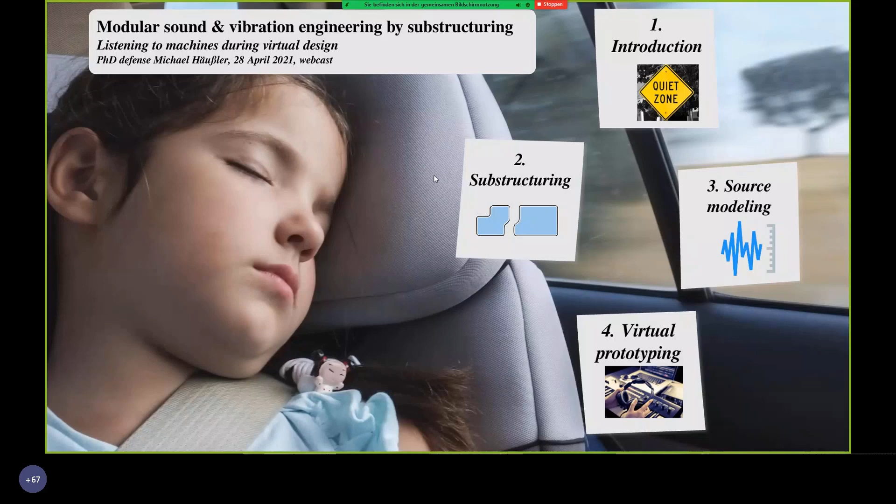And what we don't want is to be disturbed by any background noise of machines running in the car. So my talk is about the sound engineering required to design cars towards this goal. I'll give you a quick introduction by showing you a current electric vehicle in production. Down here you can see the battery, a lot of cables, the car body, and this component in the middle is called the electric climate compressor. These components can be very noisy, especially when they cool or heat the battery cells.

And I'm going to give you a quick listening example of that now.

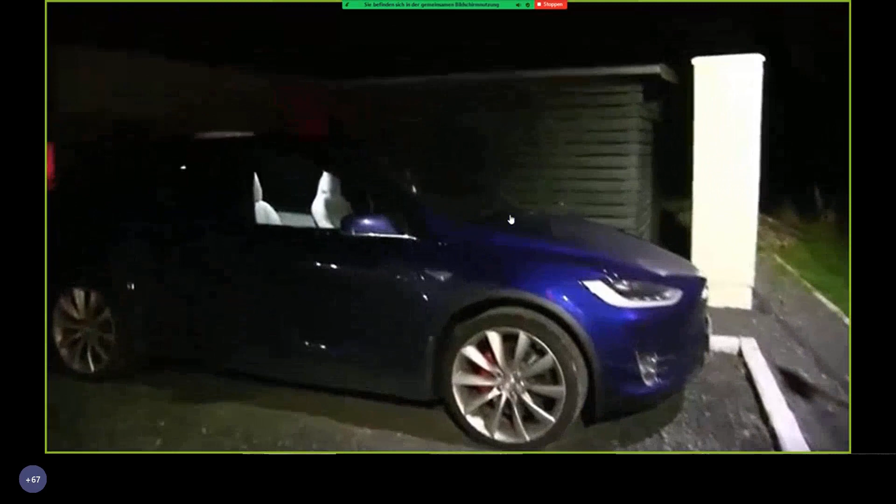I am at the supercharger in Elverum, and right now I'm getting about 100 kilowatts. And you hear this noise? This is completely normal because we are receiving so much energy so fast. So the compressor are working on high gear. You can actually feel the heat coming out here. Yeah.

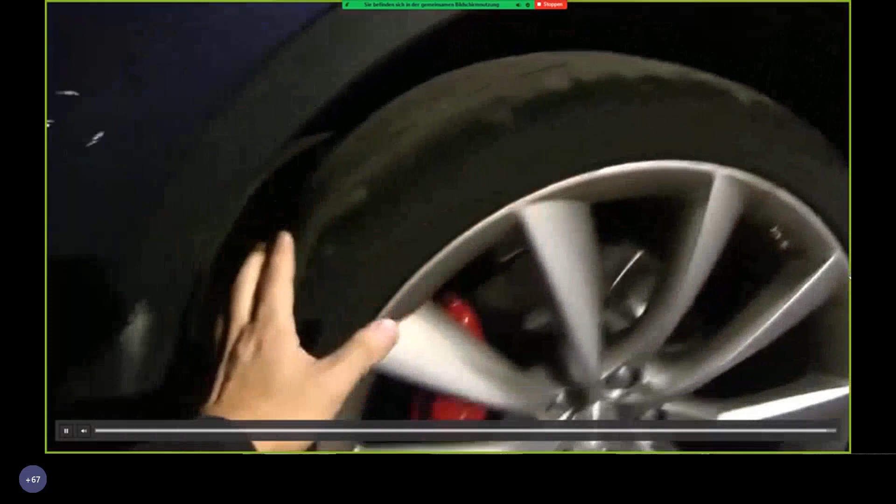So this YouTuber is perfectly right. Unfortunately, the cell heating rate goes up quadratically with the current when charging or discharging the batteries. So we kind of need this component in every vehicle.

Now the art of acoustic engineering is really to think about how we connect this thing to the vehicle and isolate the sound in order to not hear it. But it even goes further because you cannot just add excess material which is not required. If you think about acoustic countermeasures, you could think about intermediate masses and sound insulation capsules, but they all add weight, costs, and excess resources that you need.

And if you then think about the yearly production rates of popular vehicles, you can see that this is actually an important point to consider to get your models right for a good design. To make things concrete, I'm showing you here the setup of the virtual prototype, which I'm going to show you at the very end in my PhD thesis. This was a climate compressor that was isolated from the vehicle with a double isolation, so you've got two sets of rubber bushings and an intermediate mass called a carrier in between.

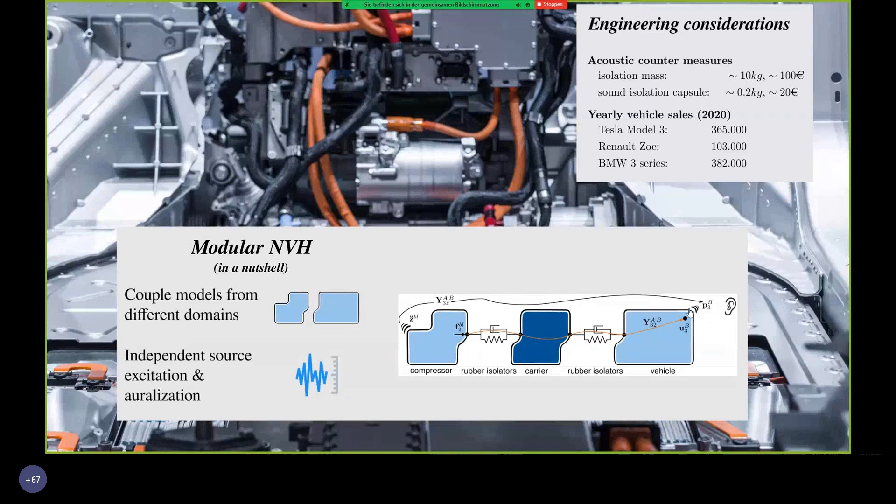What you really then want to do is take individual component models, which you model with the most convenient approach, and virtually couple them together in order to predict the vibration and sound transfer path all the way up to the driver's ear. You also need an independent description of the source excitation of this component, which in this case is the compressor. This both transfers sound and vibration over the structural connection points and also over the airborne path by radiating directly from its housing. Then you want to do some signal processing in order to listen to your design that you now have virtually in your computer. This is what I'm going to explain in more detail now.

So let's jump into substructuring. Imagine you've got a model of structure A and structure B, and you want to couple them. There are really only two coupling conditions: you've got the vibrations and forces acting on the interface on structure A and structure B. If you want to couple them, you must ensure two coupling conditions: first, that they have the same vibrations on the interface, and second, that the forces acting on the interface are equal in magnitude but opposite in sign. This is really just Aktio ist Reaktio from Mr. Newton.

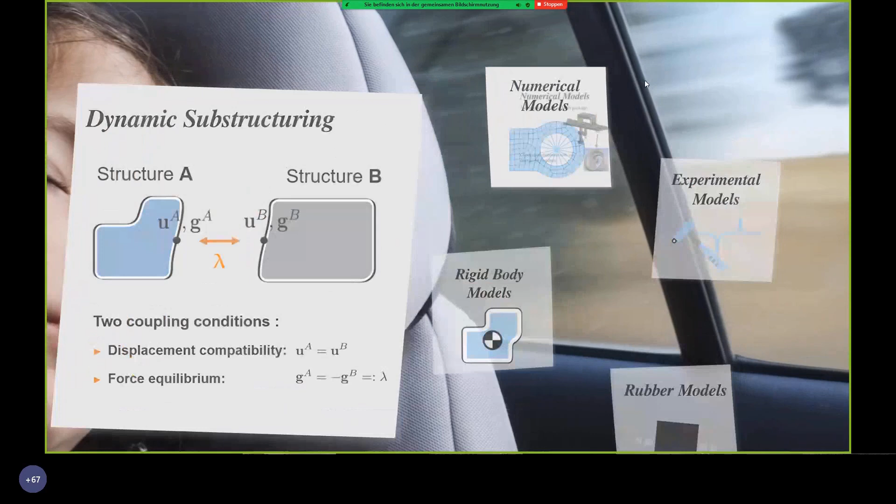So this is not so difficult, but the question is really, how do I get a good model of any substructure? The first thing that comes to mind is a numerical model, and you can obtain a description of your components by any standard finite element or multi-body simulation package.

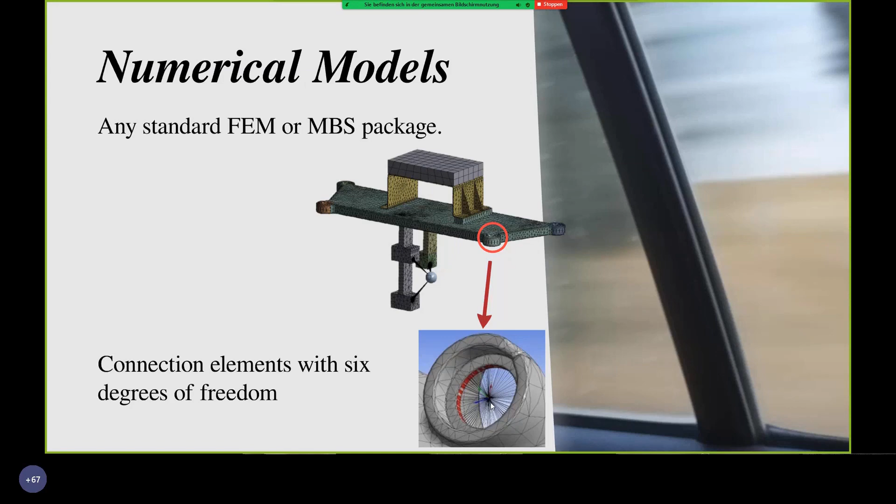As I've shown here in this example with a finite element model, you can take your connection points at the interfaces and place one of these rigid elements there. These are like a virtual point in the middle of the connection point with 6 degrees of freedom where you can enforce the coupling conditions with the next structure.

What you can also do, if you have a complex structure that's too complex or takes too long to get an accurate numerical model, or you just don't have one, is take an experimental model. This seems straightforward at first, you take vibration sensors and force sensors and measure the relation between forces and vibrations at these interface points. But in order to have a description you can couple to other models, we use something called the virtual point transformation, which is really key to most of the things I'm showing here.

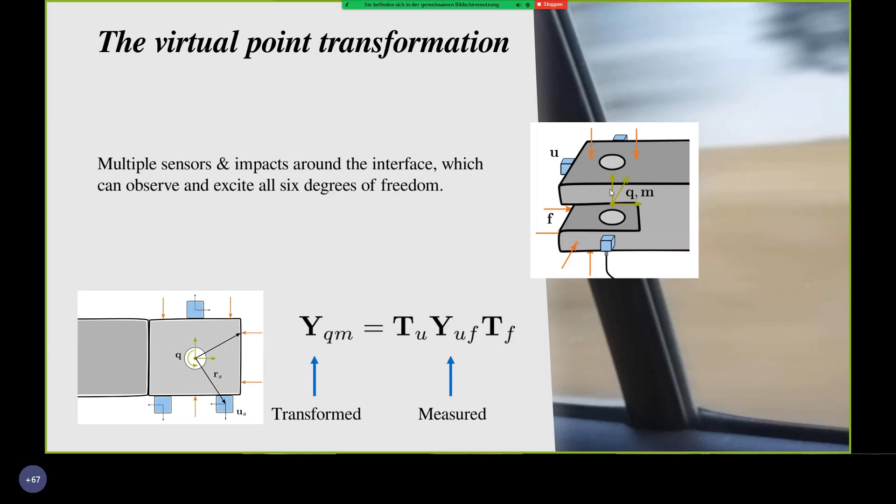So what you do is equip your connection points with a couple of sensors. You perform a few impacts with your force sensor equipped impact hammer, and then measure a transfer function. By knowing the geometry and position of your impacts and sensors, you can use transformation matrices to transform your measurements to a description at a virtual point in the middle of this connection point. This is then compatible again, for example, with your finite element model.

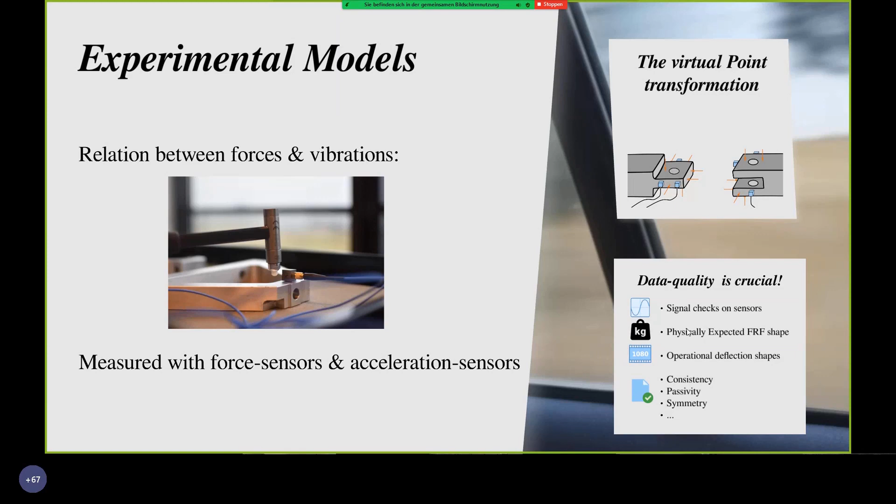The real catch, and what I want to stress here, is that data quality is crucial. You want to do all the checks at your disposal for confirming you have an accurate experimental model. We've learned the hard way what can go wrong in these experimental models. But other than that, this is a really handy modeling approach for a substructure, and rather quick if the structure already exists.

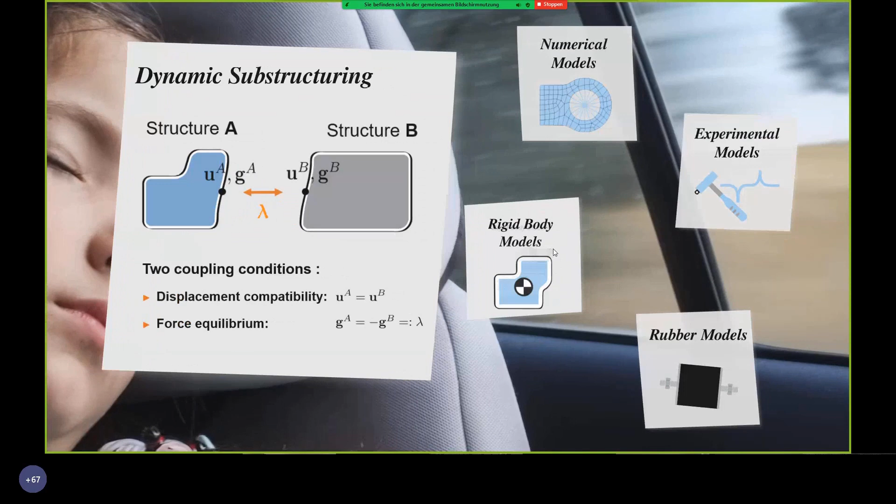What's even quicker, if you have a really simple structure in your transfer path that you can model as a rigid body, is to just model it as a rigid body. Imagine one of these crosses, they're basically rigid in your frequency range of interest. You just define a general coupling point on this cross, and we formulated the equations such that they fit nicely into this substructuring framework.

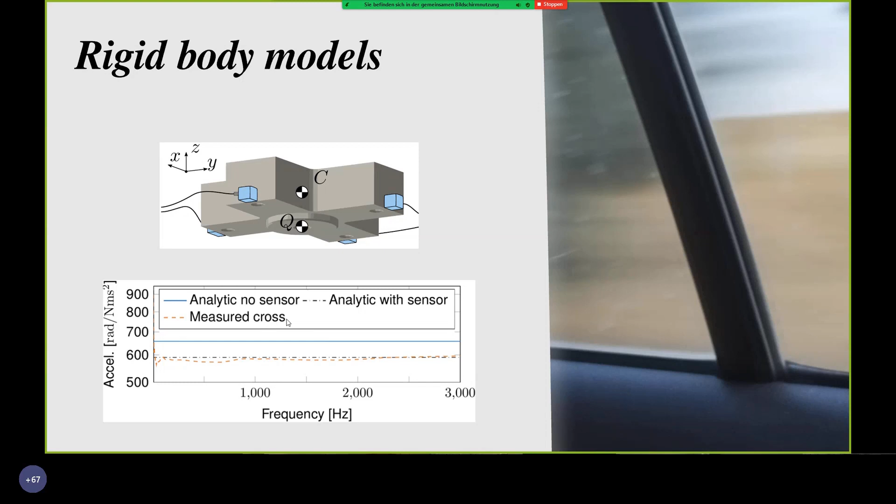The only thing I wanted to stress here is that it's important to also consider the added mass of these sensors. If you do this, you can get an almost perfect match between your rigid body model and a reference measurement. This turned out to be very handy for some simple structures, or these crosses that you can use for testing.

And then lastly, you often have rubber isolators in your sound transmission path. Here it wasn't exactly clear to us how to model this at the beginning of my research project, because you have quite a few challenges with these rubber models.

One approach we found in literature was called inverse substructuring, and here the idea is quite simple. Imagine you take two of these crosses I've just shown you and attach them to your rubber bushing, perform your measurements on these crosses, and transform them to two virtual points with 6 degrees of freedom on either coupling point of the rubber bushing.

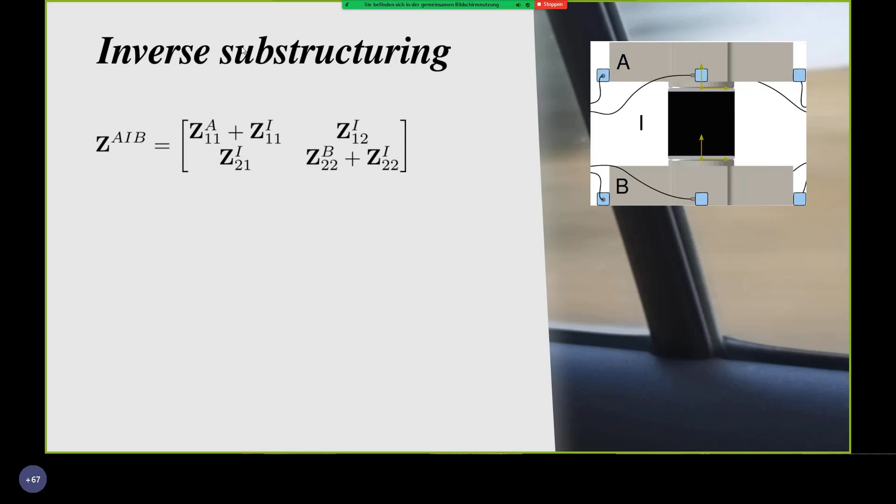So you end up with a dynamic stiffness matrix of this assembly. Inverse substructuring uses the fact that these off-diagonal terms are only a property of the connection element, which is the rubber isolator. To come up with a model for this full isolator, you assume a simple topology and a negligible mass of the rubber isolator.

To make things really simple, if you just think of two masses connected by a spring and look at this dynamic stiffness matrix, you can see minus the stiffness on the off-diagonal, and then recreate the on-diagonal term you want. So basically you make this simple topology, degree-of-freedom to degree-of-freedom connection assumption and negligible mass assumption, and then build your rubber isolator model from that.

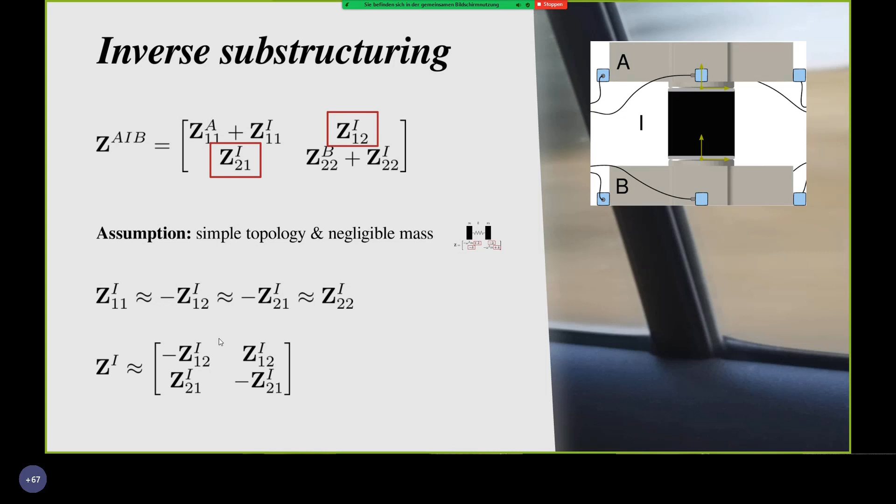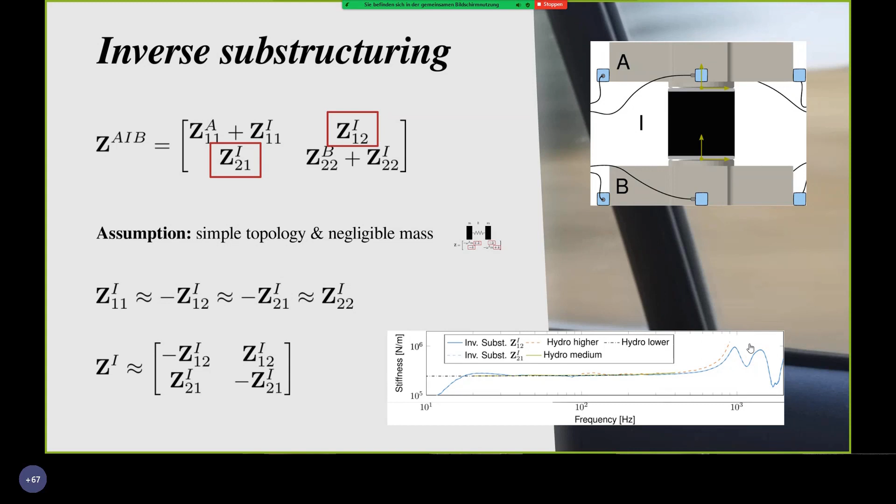Now, if you look at these off-diagonal terms, which you can validate with measurements on a hydropulse measurement machine, you get a pretty accurate match in the determined stiffnesses. What's also interesting is that towards higher frequencies, you can see these dynamic stiffening and weakening effects again, which are due to internal continuum resonances in the rubber bushing, and they sometimes cause problems with gearbox whining and electric motor sound. This is something we've already seen in other projects.

All right, but as I said, you make quite a few assumptions here. So why not just go ahead and use full decoupling? As I mentioned, we can model these crosses quite easily as rigid bodies, and then just decouple them from the measurement taken on the coupled assembly.

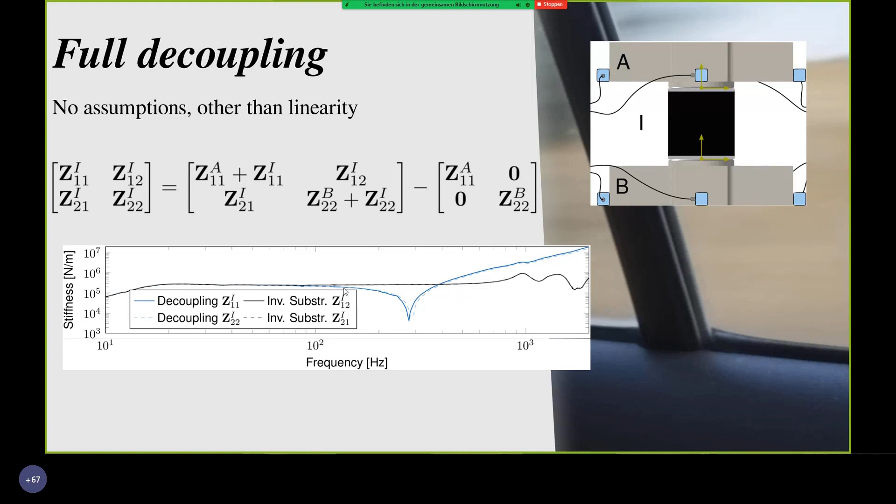And then we get the rubber bushing model, and we have no assumptions other than linearity. If you do that, you can also look at these on-diagonal terms and compare them to the off-diagonal terms, which should be equal under the assumptions of inverse substructuring. But you can clearly see that this is only true up to an upper frequency limit, because after that...

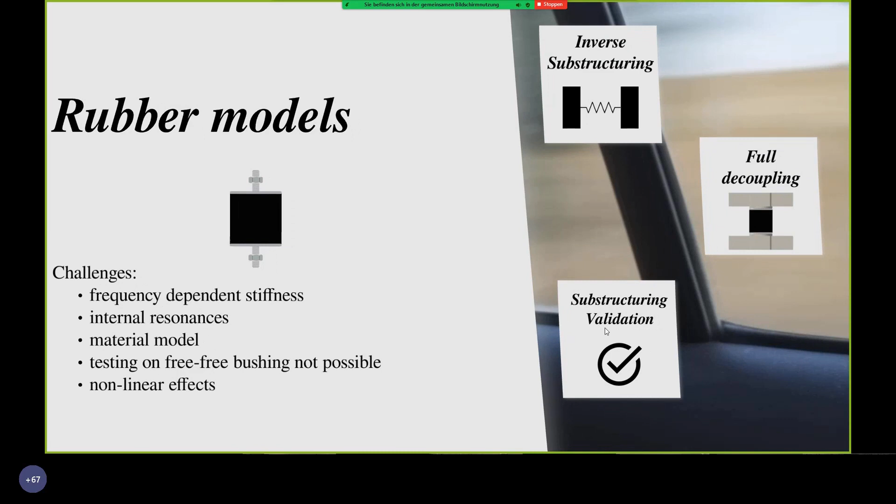...the mass effects of the rubber bushing kick in. But the important point is really to see how these models perform in substructuring. So what we did is set up a small validation measurement where we used these bushing models for predicting the FRF of a new assembly. You can see that with this decoupling approach, you get an almost perfect match in your prediction with the reference measurement. And here, with this inverse substructuring approach, you can see from the list that we tested quite a few different variants of this method, but you can still never get it quite right.

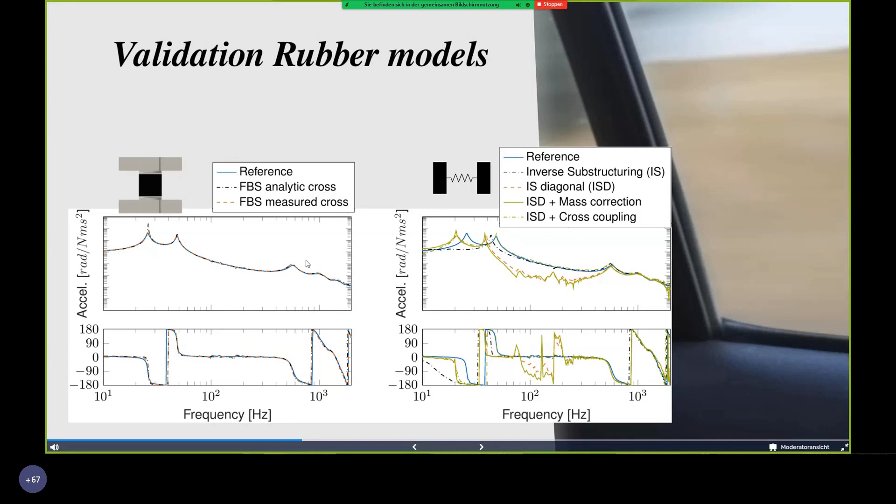So we were very happy with these results, and we use them a lot also in our daily practice and in the rest of this thesis.

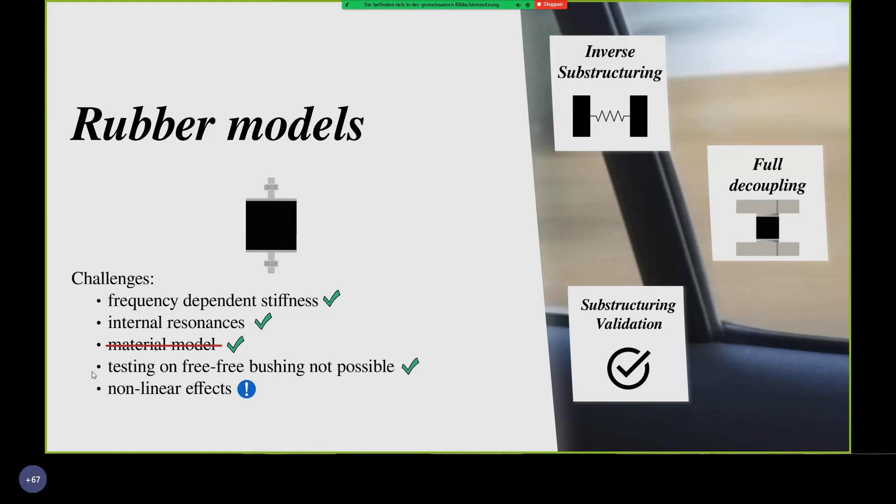So with these models, we've covered quite a few of the challenges. We include the frequency-dependent stiffness and internal resonances in the bushing. We kind of got rid of the necessity to have a material model because we just took the component as it is and modeled it. And the only thing that's missing now is nonlinear effects, but there is a lot to come from bright people working currently at the chair, also in this direction.

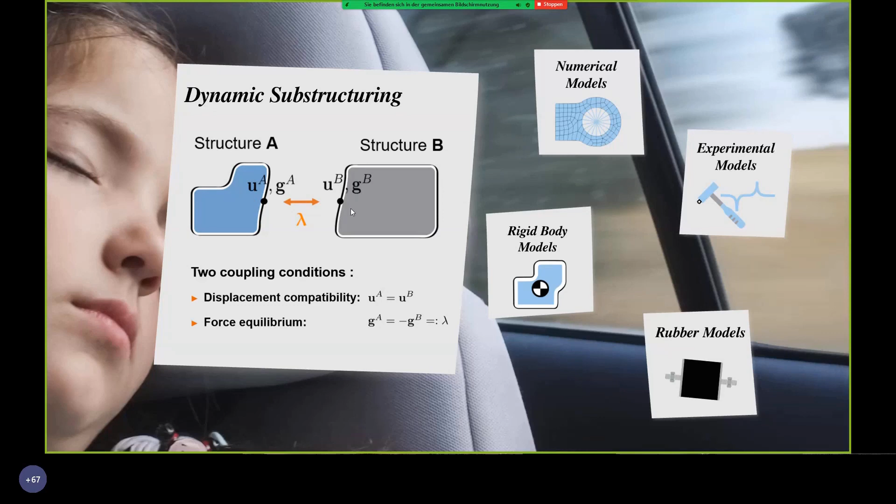But if we look again at the high-level picture, we've got quite a few models at our disposal, which we can couple to each other in order to simulate a complex transfer path in a vehicle. So the last thing which is now missing is how we model the source excitation. And this is what I'm going to talk about now.

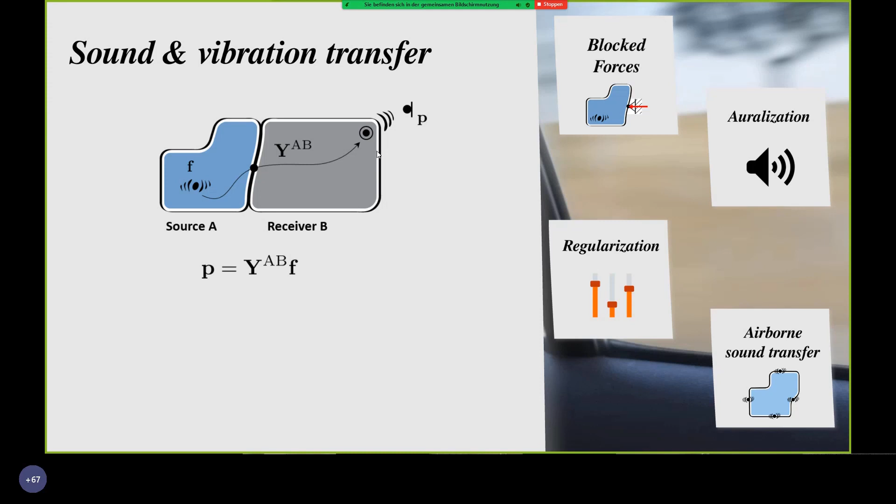So what you have in your vehicle is your source A, and it has some internal forces which are exciting the system. And these vibrations are transferred with the transfer function of the full assembly AB to sound and vibrations on your receiver.

The problem is that these internal forces are complex to model. You've got maybe unknown parameters, or it's a supplier part where you don't have a model of. And even if you take the component on a test bench, you need some sort of data processing to make these results transferable to what you're going to have in the final vehicle. So what you really want to have is an abstract quantity to describe the source excitation independently of the test bench.

And this is where blocked forces come in. I'm going to explain in a nutshell what these blocked forces are. If you really think about them, these are the forces that, if your source is in operation running this component, and if you would apply the blocked forces on the interface here, then they would block any vibration on the interface. So the interface is completely blocked, and therefore you would not have any vibration and sound left on the receiver. This is really just like an active noise cancellation. This is, of course, not what we really do, but it helps in thinking about why these blocked forces work.

So imagine, since we model our system as a linear system, we have our source in operation, and then imagine we just add these blocked forces with a positive and a negative sign here on the interface. So we basically didn't modify the original situation—we've just added zero to the equation. But we know from the picture before that these two components cancel each other out on the receiver. So these two contributions are canceled on the receiver, and we see that we can simulate all sound and vibrations here on the receiver with just, if you want to be accurate, the negative blocked forces.

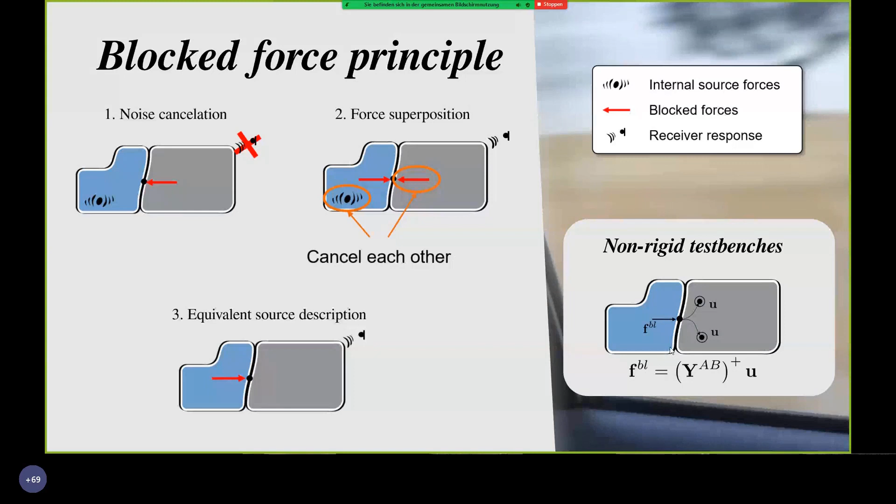Okay, so that helps in thinking about why they work, but of course we can never build a really rigid test bench. So what you do in practice is attach your source to a flexible test bench, record the vibrations on this test bench, and then inversely compute what forces would have caused this vibration.

So now we have the source description and our transfer path, potentially from substructuring, and we want to make predictions for what happens at the driver's ear and also listen to that. So we've got to look at some of the signal processing involved in this whole approach.

What we typically do is record the vibration levels on the test bench. We chop that into individual time blocks, transform these into the frequency domain, do our computation of the blocked forces, and make our predictions for what's happening in the driver's cabin.

And then we get our result for sound pressure in the driver's cabin, also in these frequency blocks. For listening to them, we need to go back to the time domain. The simplest approach is to take these frequency blocks, transform them back to the time domain, and stitch them back together. This is called cyclic convolution.

But if we create the sound files like this, you can see a problem, since we violate an assumption of the Fourier transform, namely that the signal is perfectly repeating in each block. If you listen to the sound files created this way, you can hear that this is not really what you want—you can hear these jumps at the time block bounds.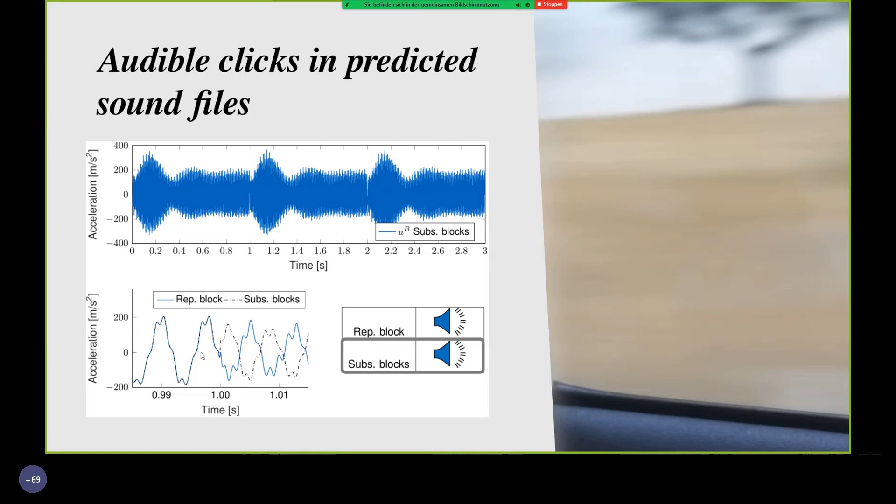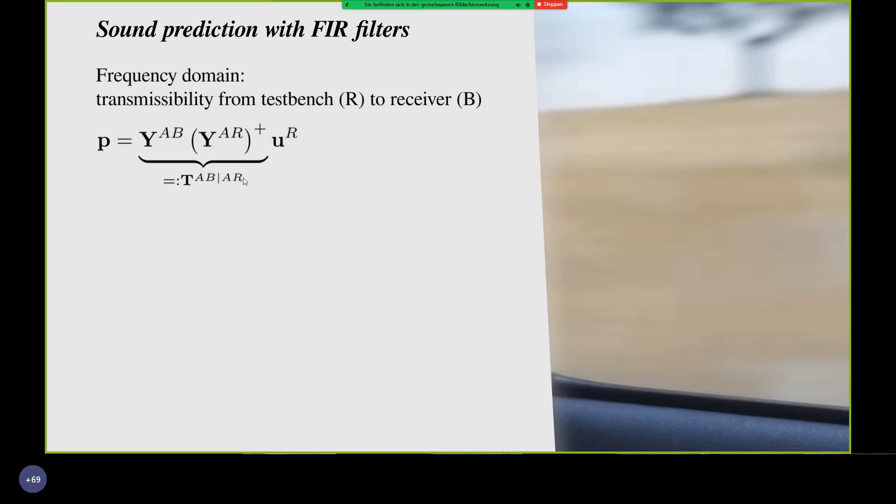So we have tested quite a few methods for getting rid of this. One that I'm going to show you, which I think is generally well applicable, is that you take all the operations in the frequency domain for coming up with the prediction at the driver's ear and cast that into one transmissibility matrix. Then you transform this transmissibility matrix to the time domain, to a FIR filter.

Then I'm directly taking my recorded time signal from the test bench and convoluting it with this transmissibility matrix. Therefore, I end up with my sound predictions directly in the time domain, to which I can listen. Here you don't make any assumptions about the nature of the excitation signal other than that you have linear systems.

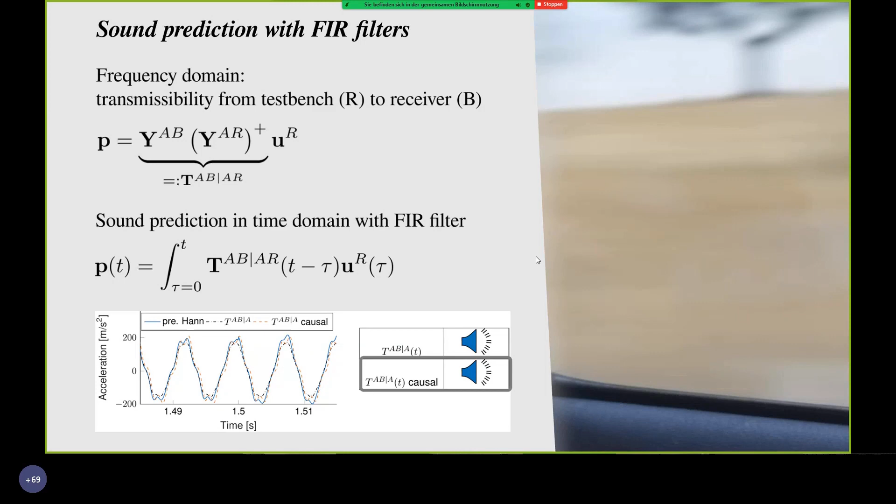And if you listen to that, you can hear that you got rid of these artifacts. All right, so now we know how to model our source and listen to the predictions.

But there's a last topic in order to have clean predictions, and this is the field of regularization. Regularization is really concerned with this amplification of measurement noise that you have in the inverse computation of the force.

Imagine this very simple system of just a spring, and you measure the vibration at this point, and you want to infer what the force was that caused this vibration. But unfortunately, you also have some measurement noise in your vibration signal—an error.

So the estimate that you have of this force is going to be made up of two components: first, the true force, which you want to identify, and then also this error component. This is no problem as long as the error component is small compared to the true vibration.

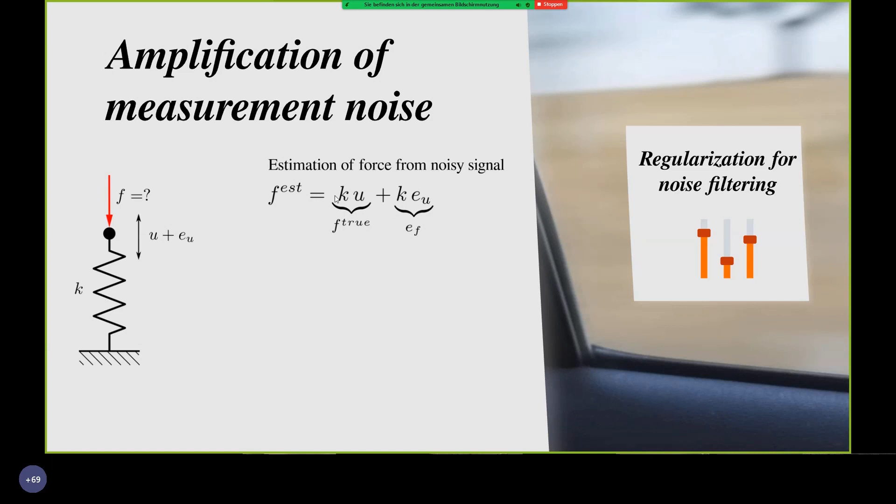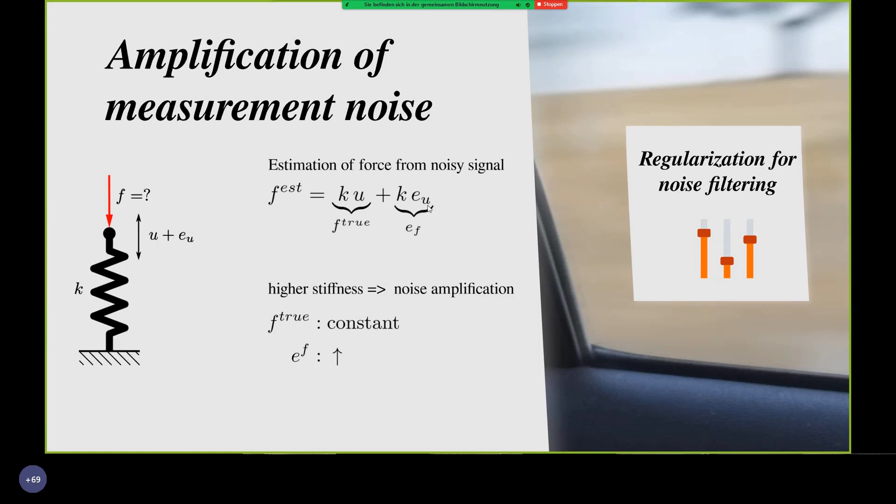But imagine you've got a very stiff system with a very stiff spring. Say your force stays constant, but the error or measurement noise in your vibration signal is typically independent of the overall level. So this error component in your computed forces increases quite a bit, and this can give problems which are actually audible in your predictions.

What regularization does is filter the forces in these stiff directions. We've tested multiple methods for this, and especially one where you use the signal to noise ratio for determining the filter factors turned out to work very well for the compressor.

So let's listen to a validation measurement on a test bench. All right, now let's listen to the regularized prediction.

Now that sounds very similar to the validation measurement, but now let's listen to the standard inversion without regularization.

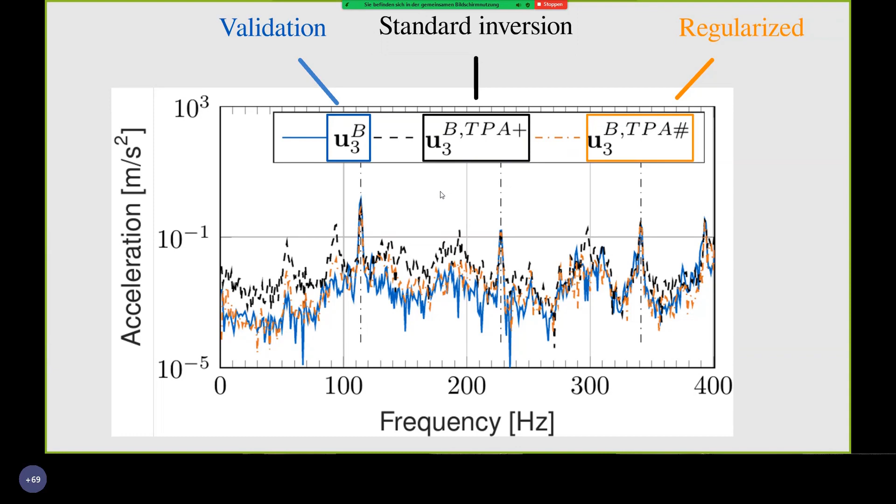Here you can hear a lot of background noise and rumbling, and this is really at the resonance frequencies of your receiver—this sound pollution that you hear. What really happens is that you've basically amplified your measurement noise twice: once in the stiff directions of your test bench, and then, just by chance because you're unlucky, you hit a resonance frequency of your new receiver and amplify the measurement noise again. This can yield spoiled sound predictions.

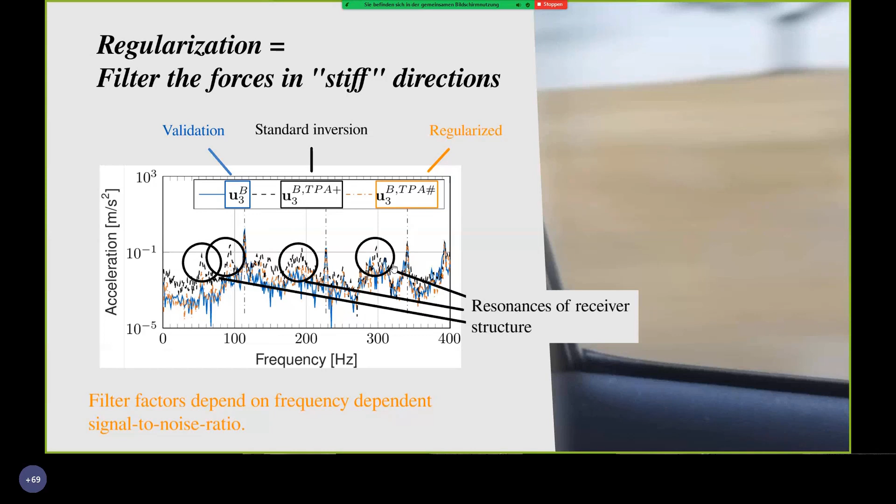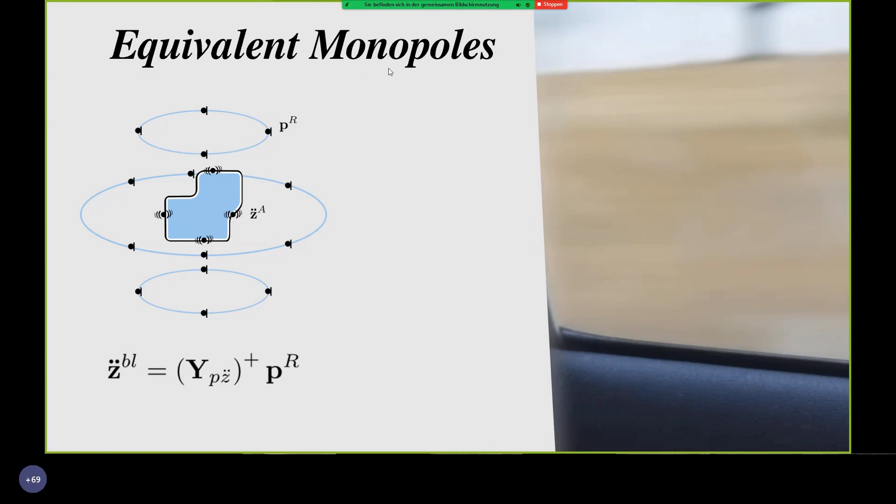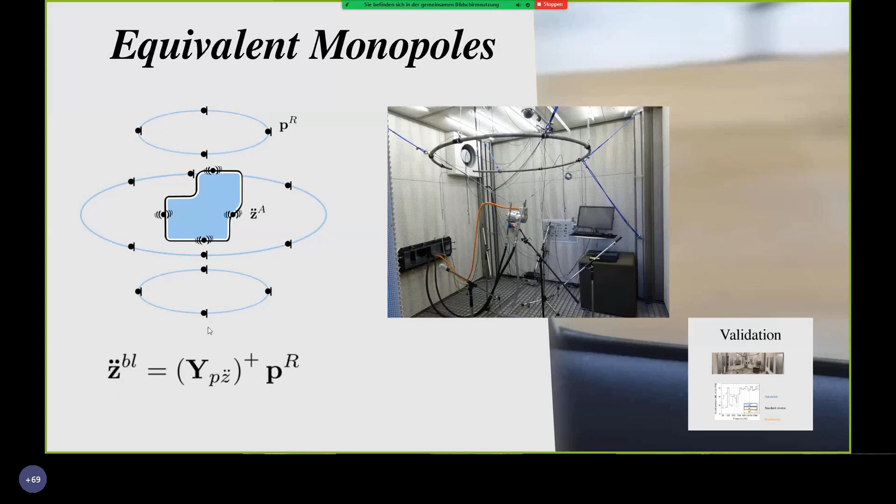So this was insightful and good. Then the last thing, I'll go over this quickly: since the e-compressor is radiating sound also directly to the air from its housing, we described this transfer path with equivalent monopoles. So basically, you hang up your source component, surrounded by many microphones, and then you also inversely compute an equivalent source quantity describing this airborne path.

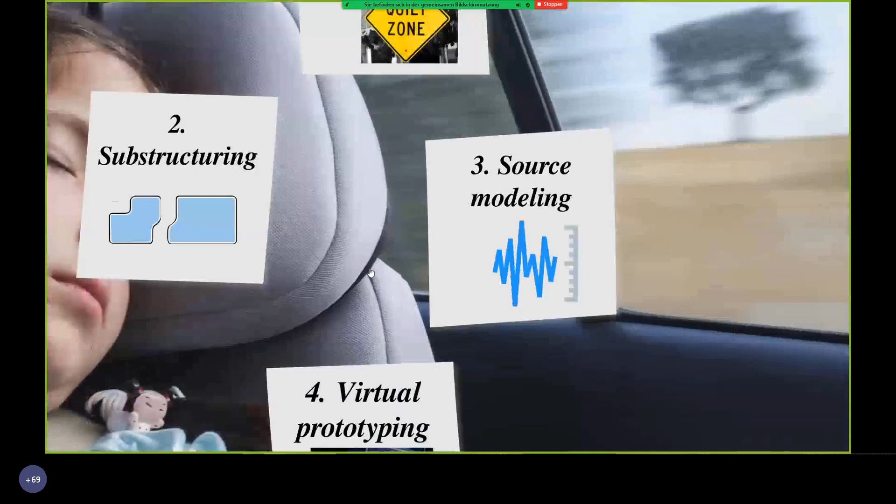Now if we look at this, we're really finished with the source description, and together with substructuring, we can now go to the fun part where you use this in a virtual prototyping approach. Here again is the design of an electric vehicle prototype where the compressor is doubly isolated from the vehicle. I'm now going to go quickly into the individual models we used for modeling this transfer path.

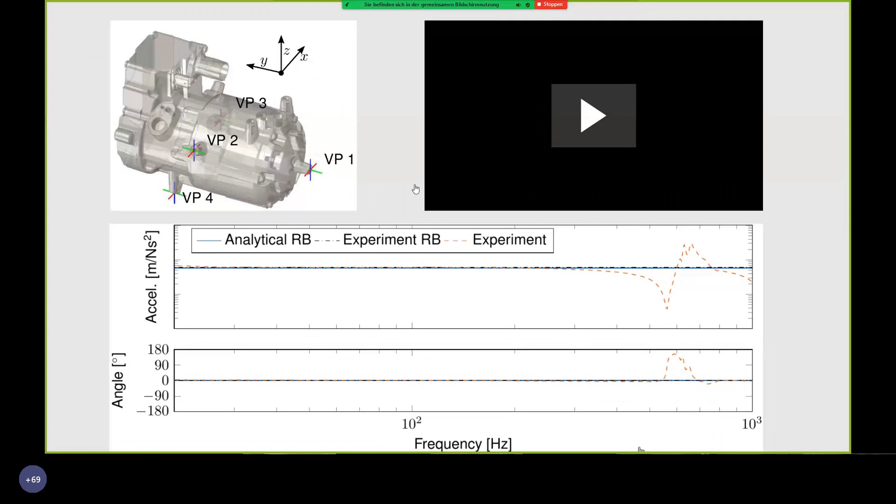The compressor was described just as a rigid body. I'm showing this here in a small video.

So you can see here that you have these 4 connection points where the compressor is attached to rubber bushings, but in essence this is just a rigid body. The rubber isolators are described with the method that I've just explained before.

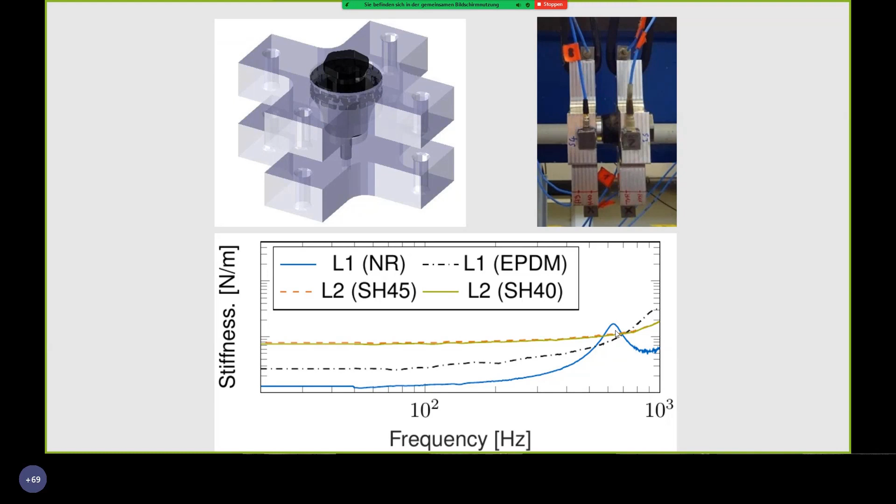These are 4 different variants for the potential rubber isolators that we could use with different materials. You can see here what is very interesting: one of these internal anti-resonances, where one rubber bushing which is supposed to be the most flexible one, is actually stiffer than all the others. For this intermediate mass, we used a finite element model.

And then we've also measured the transfer path to sound pressures and microphones in the vehicle. The only thing which is noteworthy to mention here is that you need to consider the added mass of these crosses, because especially at higher frequencies, if you don't decouple this mass, then you get quite different and actually wrong transfer functions in your model.

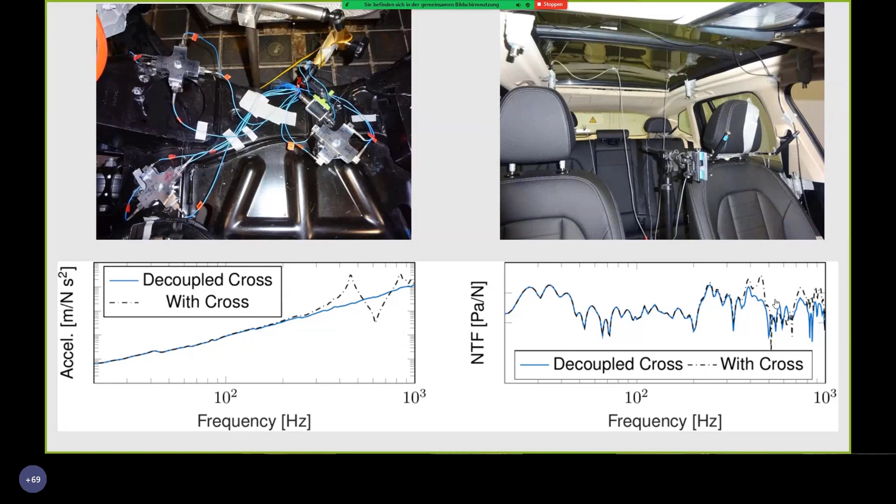All right, so with all these components, you can see that this is actually quite flexible. You can choose whatever approach fits your design best for the individual components. And now we can make predictions for what the transfer function all the way from the compressor to the driver's ear is going to look like.

And we've tested this design physically. And what you see here is a validation measurement for an input on the compressor and an output on this intermediate mass. And what you can see here is that the substructuring result fits the reference measurement quite good. Only here at higher frequencies.

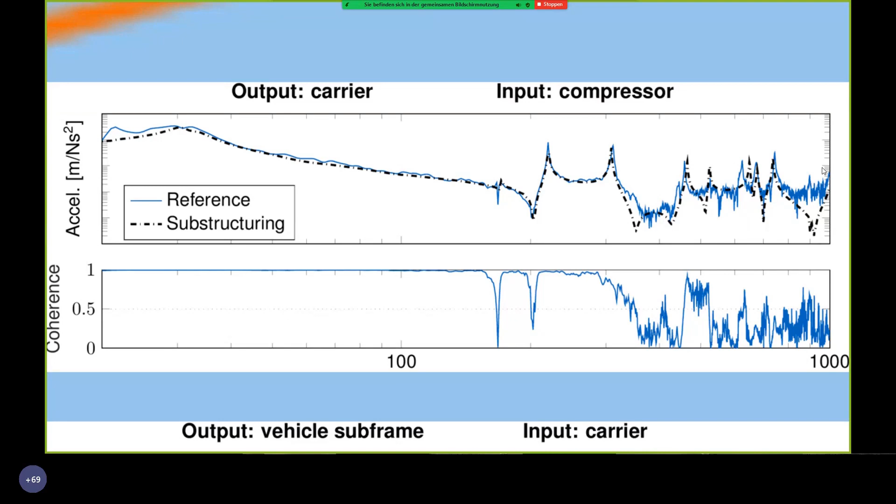And I've also plotted the coherence of the reference measurement down here. You can see that you cannot apply enough input energy to your system to really measure this transfer function. And with substructuring, since you've modeled all your components individually or measured them with a good signal-to-noise ratio, you can actually make predictions at frequency ranges which were previously not even possible to obtain, even if you have a full prototype. So that was very interesting.

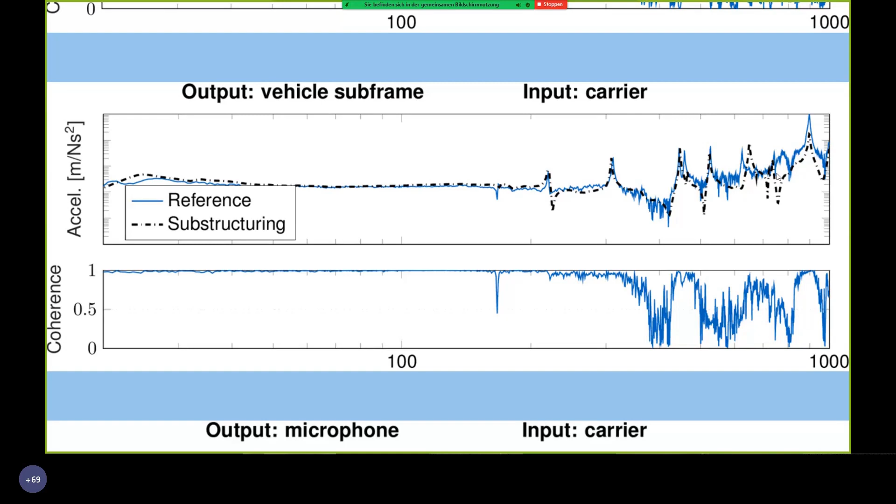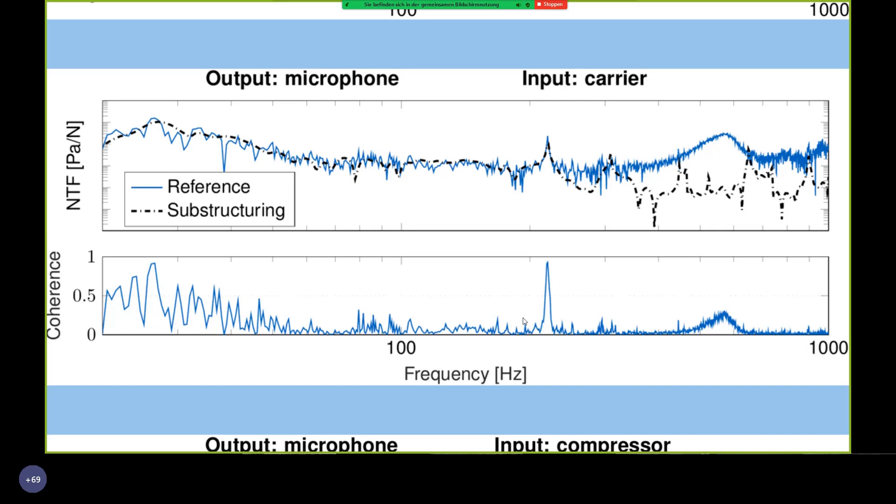So here you can see a similar thing for an input on the carrier and an output on the vehicle subframe. And here you can see an input on the carrier and an output on the microphone in the driver's cabin. And here you can really see that it's almost impossible already to get a good signal-to-noise ratio. So that was very rewarding.

And then with your source description, you can go ahead and make noise predictions for what's going to happen inside of the driver's cabin. So what I'm showing here is a low speed of the compressor and a high speed of the compressor. And you can see at lower speeds, if we took a validation measurement, that this one is almost entirely dominated by the structure-borne sound.

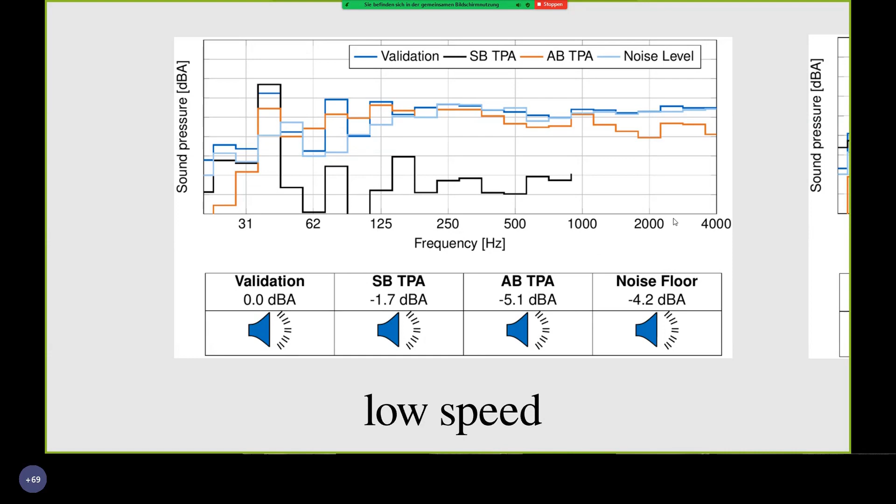And also, if you listen to the interior sound, you can hear this. So that's the sound from within the vehicle, and this is the prediction for the airborne sound now.

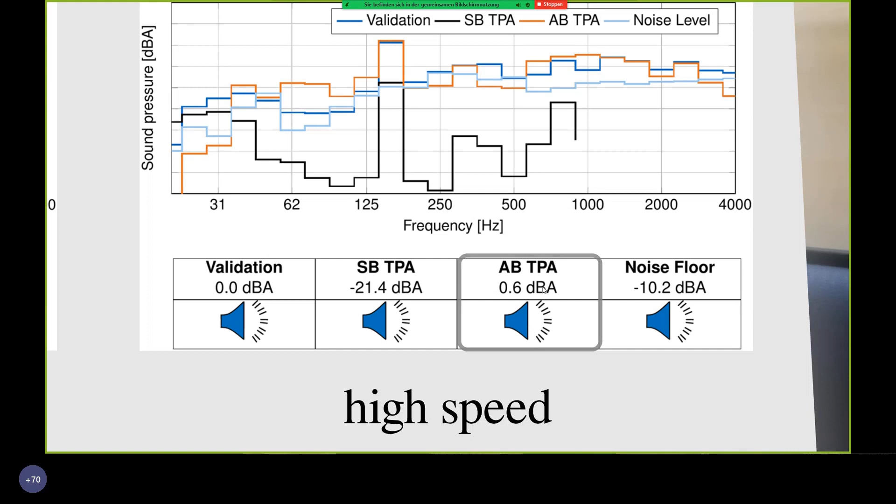All right, so the learning in this case was, well, the structure-borne isolation is good, maybe even too good, and we would like to find a less complex design, which uses less material and is not that heavy, so that the airborne path is actually dominant and really sticking out of the noise floor. And you might want to consider wrapping your e-compressor into a sound insulation capsule.

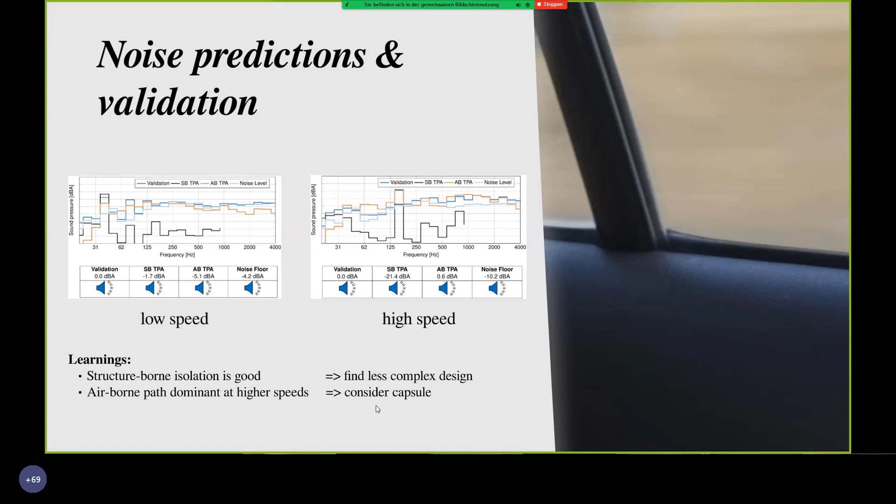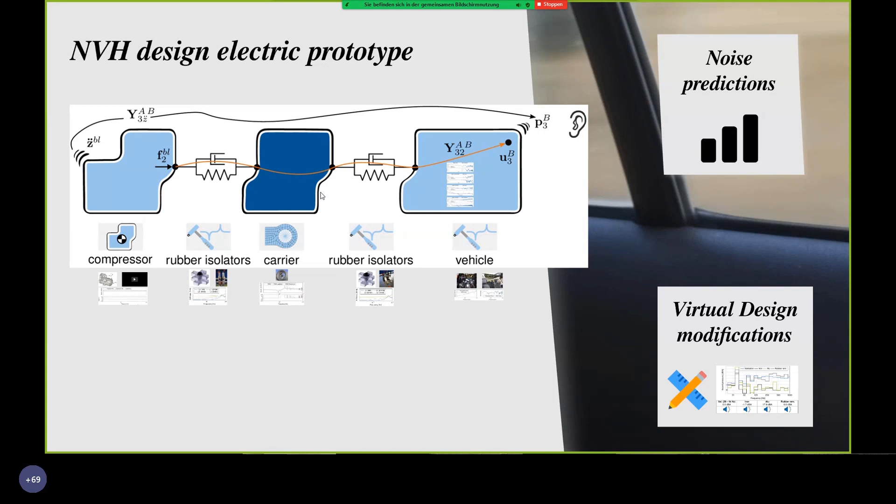Okay, and now that you have this flexible model, well, then it's natural to apply some virtual design modifications, like modifying the finite element model of your carrier here, or just changing the rubber bushing stiffnesses, or play around with your design and see what happens if you leave out bushings.

And the last thing which we did in the last chapter, which lends itself naturally, is that you parameterize your individual models and then let an optimization algorithm find the optimal isolation mechanism for your design. And what we also see in industry a lot now is that you use the description of your component and these blocked forces to agree on targets with your suppliers.

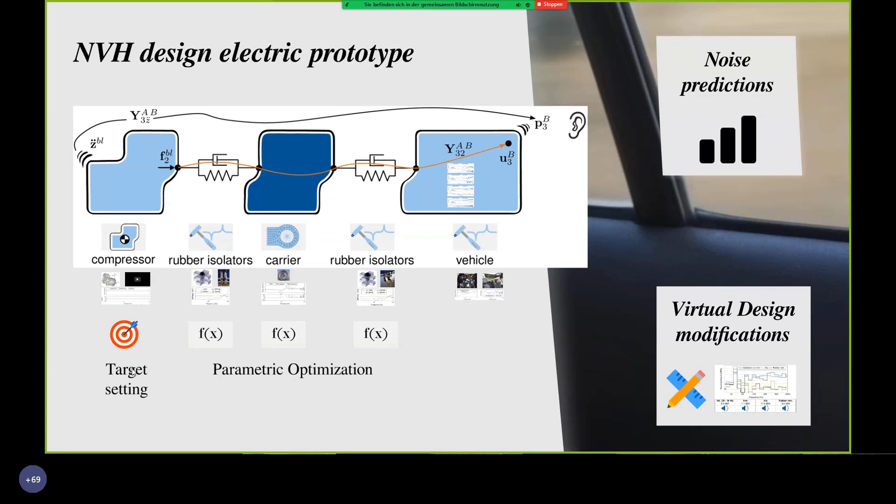All right, and with that, I hope that I've given you a good overview of what I did in very brief time. So this was 5 years of work.